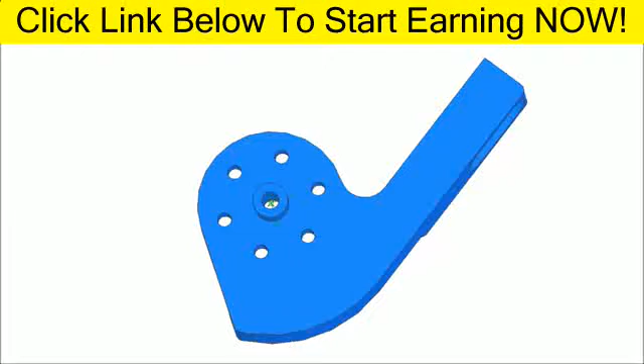Oh, Scheibenkleister. This is the broken torque arm of my bicycle hub, so I need to redesign it a bit and make a new one. But actually this suits me quite well, so I can show you how to make a rather complex part with Estlcam. It is not even that difficult, so let's first have a look at the redesigned part.

We need to machine it from 3 sides. The front with the pin, the slightly more complicated back, and finally the slots. So let's start with the front. The final result will look like this.

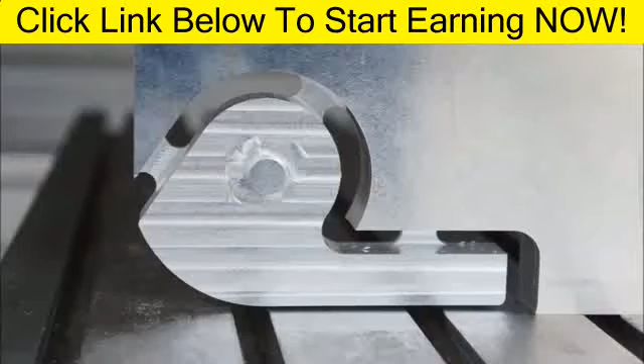To achieve this, we first create a pocket around the pin to remove the top layer. And then we just cut out the whole workpiece.

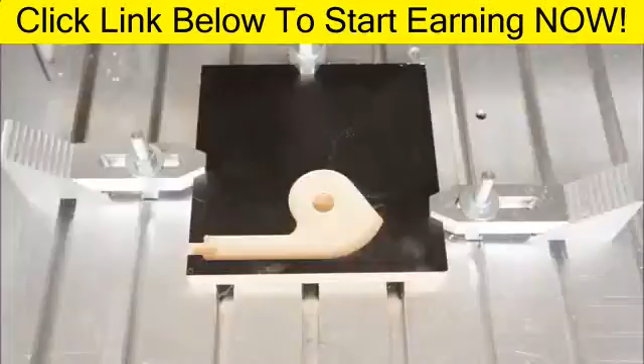Now we need to turn the part and somehow clamp it down. For this I machine the negative of the first side and simply glue the part in with some epoxy. This way it is automatically perfectly aligned and well secured. Now we can prepare the second side. Let's first begin with this easy pocket.

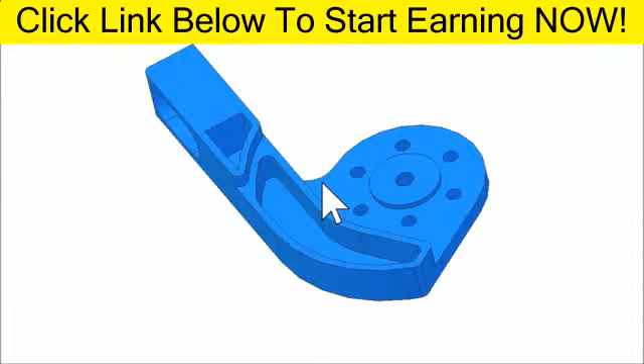Now let's have a closer look at the part again. This side basically has 3 depth levels: 4, 9 and 10.5 mm deep. All we need to do is to create appropriate pockets for each level.

First the complete area of all 3 levels combined at 4 mm depth. The next is 5 mm deep and starts at the bottom of the previous 4 mm level. And finally this one with 1.5 mm depth, 9 mm below the surface.

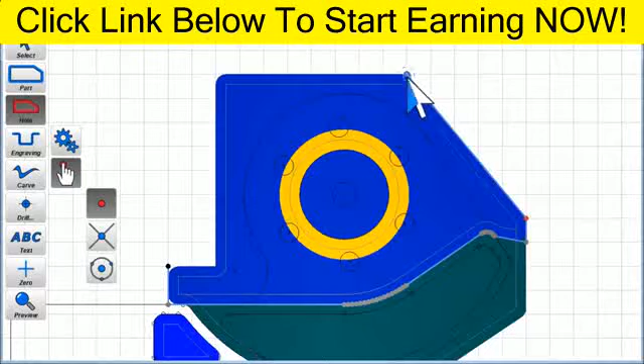Note that I extended the pockets well beyond the actual workpiece edges. This is important, because if you don't, the tool will not clear all corners correctly and you will also end up with a nasty burr along the edges. Finally, let's add the holes and the remaining pocket.

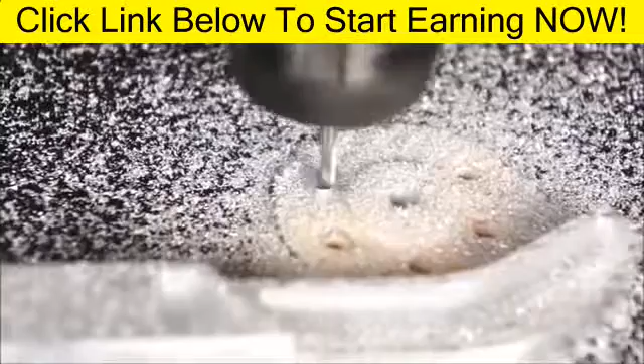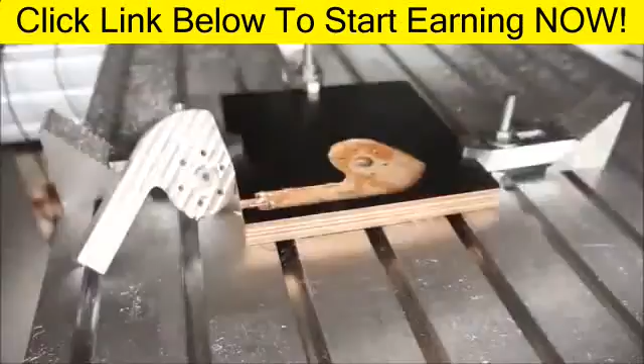The nice thing about most 5-minute epoxy glues is they get soft when heated. For the final slots, I just put the part into a vise.